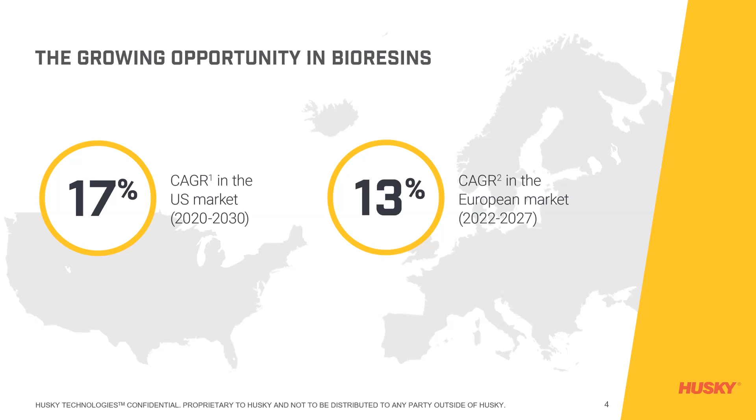We're looking at 17% CAGR in the US market between 2020 and 2030 (note: referring to projected years), and about 13% CAGR in the European market, between 2022 and 2027. For innovative brands and injection molders, this adds up to significant growth opportunities.

What's driving the growth in bioresin adoption? First is the consumer. Consumers today want to know that the products they purchase, as well as their packaging, are sustainable. Because bioresins are derived from relatively sustainable material and can be engineered to be biodegraded, many consumers feel bioresins are a healthier choice for the planet.

The second is ESG initiatives. Brands and molders are under increasing pressure to adopt an ESG strategy. ESG stands for environmental, social, and governance — it's a way of doing business. Using bioresins for injection molded products and packaging helps organizations meet their ESG objectives and signal to consumers that they're doing their part for the environment.

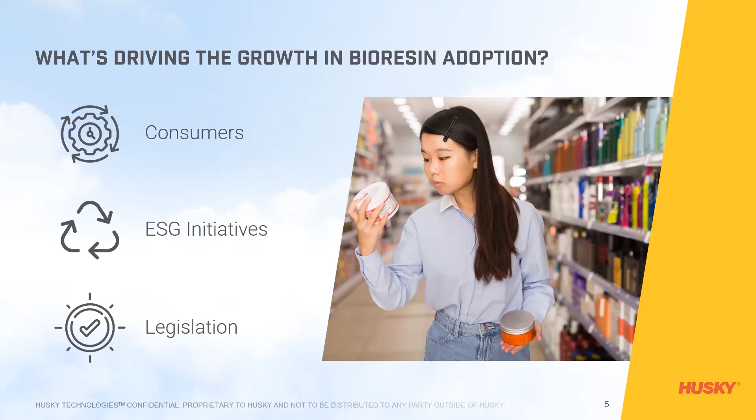And lastly, and probably the most important, there's legislation. New legislation and regulations are placing pressure on manufacturers to reduce post-consumer waste and plastic pollution. For example, in July 2021, the European Commission implemented new laws that ban or restrict single-use products made from petroleum-based polymers. Similar legislation is happening all over the world as we speak.

An overview of some of the bioresins we have available. Bioresins, sometimes called bioplastics, biopolymers, or biomaterials, refer to several categories of commercially available material that can be used in the injection molding process. What makes them bio-based is that they are made in whole or in part from renewable biological resources. These biological resources can include corn, tapioca starch, potato starch, vegetable oil starches, sugarcane, and wood pulp cellulose.

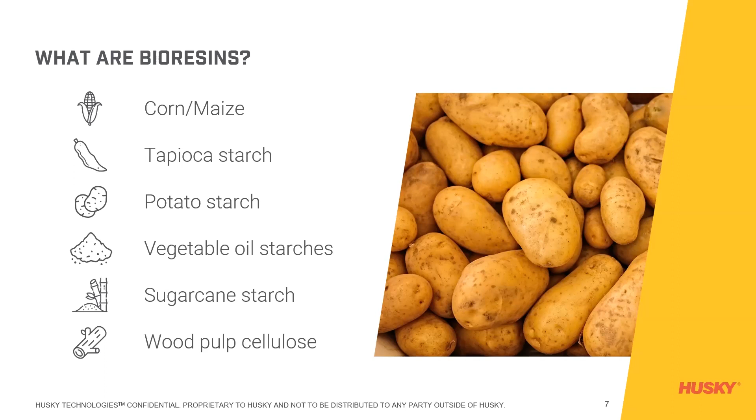The terms used in bioresins: when planning to use bioresins, it's important to note a few distinctions in the related terminology and features. Bio-based refers to the fact that biomaterials are used to create the resin. Biodegradable means the items will eventually break down in the natural environment. Not all bioresins are biodegradable.

Compostable means the material is biodegradable and breaks down within 3 to 6 months in an industrial composting facility, releasing valuable nutrients and leaving no toxicity in the soil. Not all bio-based and biodegradable resins are compostable.

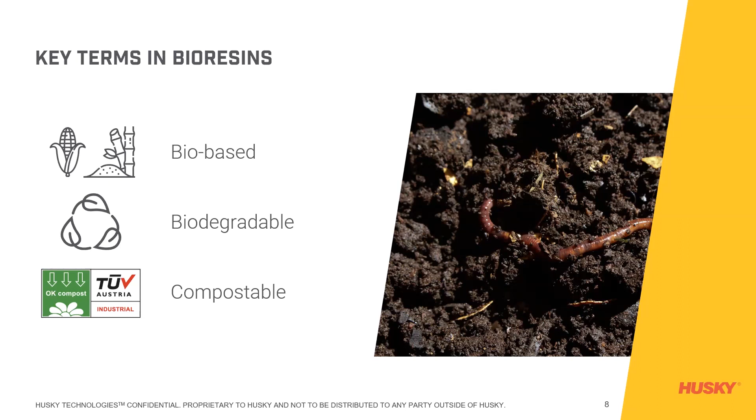This is an important slide, so I'm going to review those terms again because they're easily misunderstood in the industry today. Bio-based refers to the fact that biomaterials are used to create the resin. Biodegradable means the items will eventually break down in the natural environment, and not all bio-based resins are biodegradable—an important distinction. Compostable means the material is biodegradable and breaks down within 3 to 6 months in an industrial composting facility, releasing valuable nutrients and leaving no toxicity in the soil. Not all bio-based and biodegradable resins are compostable, so an important distinction with those 3 different terms.

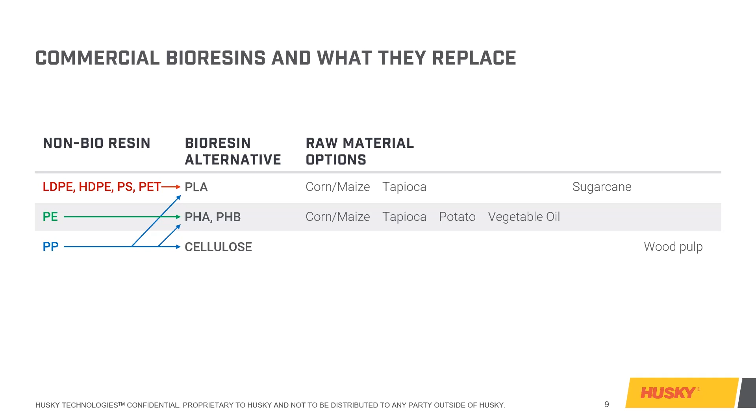So what commercially available bioresins exist, and what can they replace? Non-bioresins include low density polyethylene, high density polyethylene, polystyrene, and PET. Typically, those can be replaced with PLA. The raw material for PLA is typically corn starch or tapioca starch, and sometimes sugarcane. Polyethylene can be replaced with PHA or PHB, which again is corn, tapioca, potato, or vegetable oil based. Finally, polypropylene can be replaced with cellulose, usually made from wood pulp. So those are the 3 main categories of standard resins and the bioresins that can replace them.

A little more detail: PLA's raw materials are several different starches—corn, tapioca root, and sugarcane. The polyester is derived from renewable raw material sources, and it can substitute low density polyethylene, high density polyethylene, polystyrene, PET, and polypropylene. PHA is another one of these resins gaining popularity in the market, along with PHB. These can also be made from various starches, including corn, potato, maize, tapioca, and vegetable oil. The manufacturing process for PHA and PHB is quite unique—the polyester is derived from microorganisms through bacterial fermentation. PHA and PHB are really good at replacing polypropylene and polyethylene applications.

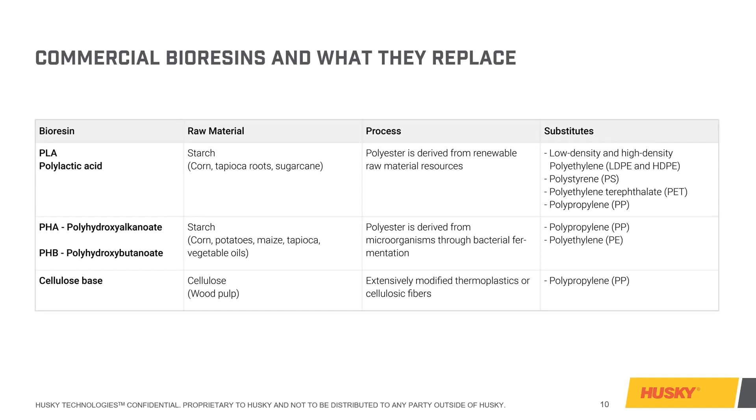And finally, cellulose based—basically wood pulp. It's a modified thermoplastic made from cellulose fibers, and it's good at replacing polypropylene.

Some of the challenges and best practices when working with bioresins: the first is material, probably one of the most challenging aspects of running these applications. Bioresin materials come with unique and challenging physical properties that can make them difficult to incorporate into the injection molding process. For example, many bioresins are highly viscous, require high fill pressure to fill molded cavities, and tend to be prone to leakage and weepage.

Next is manufacturability. Some bioresins are very temperature sensitive. To avoid this, the manufacturing process must avoid exceeding temperatures above a certain threshold. This can pose challenges for systems that are not designed to meet these challenges of bioresins.

Performance: using new materials brings a number of unknowns, especially in the area of performance. Many bioresins may not perform as well as traditional materials in terms of product preservation, longevity, safety, and other key performance criteria. These unknowns need to be addressed in order to achieve successful adoption of bioresin.

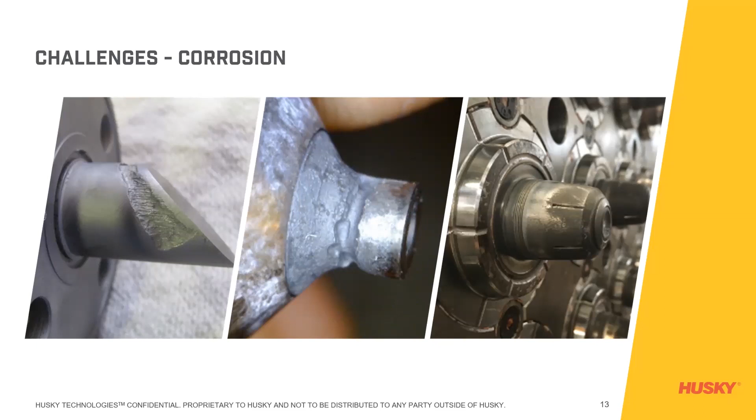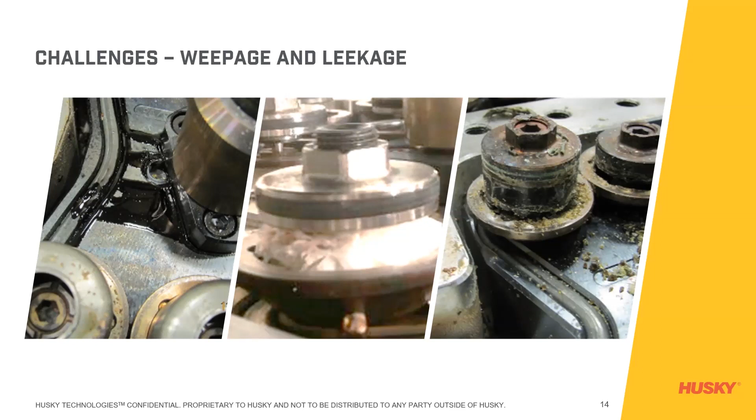Corrosion, as I mentioned, is one of the concerns with some bioresins. You have to take that into consideration when looking at the screw, the barrel, the steels used in the hot runner, as well as the mold itself. Some more examples of the challenges we see with bioresins: leakage or weepage within the hot runner system itself is commonplace with these resins due to their corrosive nature, viscosity, and how easy it is to weep or leak.

So let's talk about some of the best practices for succeeding with bioresins. To avoid issues like we've seen in the last couple of slides, here are the key best practices taken from our extensive experience with this application. First, we need to conduct an in-depth review of the application and the bioresin itself prior to any manufacturing step.

Ensure the hot runner and controller are optimized for bioresin. This should include ensuring that the manifold design is optimized, ensuring consistent preparation of the bioresin, and we'll take a closer look at some of these in the next few slides.

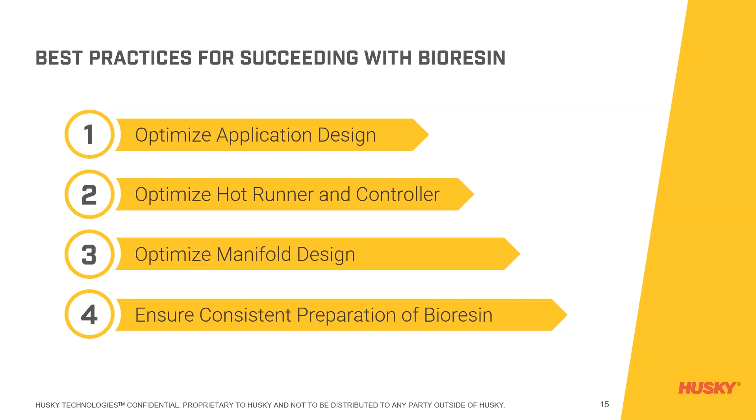So optimizing the application, or understanding the application to optimize the design. We need to conduct an in-depth review of the application and bioresin itself prior to any manufacturing step. And this should include a cavity fill analysis. Again, as I mentioned, with the viscosity difference in bioresin compared to traditional resins, it's typically a lot more difficult to fill the cavity. So that needs to be taken into consideration, and a fill analysis will help with that.

Evaluate the need for a resin test. So this is something we typically do at Husky, especially if it's a new version or a new bioresin that we haven't encountered before. We will request some resin into one of our labs and we'll do a resin test. This is usually recommended for resins with limited performance data or for particularly challenging applications.

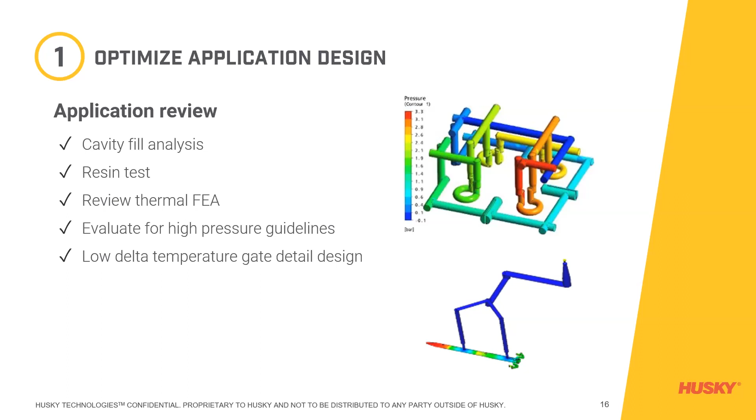Evaluate the bioresins for any guidelines on maximum pressure. Review the low delta temperature between the tip and the gate, which could cause leakage issues, something we need to pay attention to.

So specifically, how do we optimize the hot runner and controller? We need to ensure that the hot runner and controller are optimized. This should include corrosive resistant components if the bioresin is corrosive in nature. Weepage mitigation components, again, because it's so easy to leak, so easy to weep, especially with a valve gate system. We need to make sure we take that into consideration and design accordingly.

The type of gate, so a plunger gate that will give us the best possible gate quality. Individual tip control, improve heat distribution. Basically, we want the best possible thermal profile on that manifold so we don't have hot spots or cold spots that can lead to resin degradation.

And an IO connection with the machine to avoid resin degradation. Basically, what that means is that we would recommend a controller that can interface with the machine so that if the machine goes down for a certain period of time, let's say 15 minutes, that controller can automatically bank the heats so that we're not degrading the resin.

And again, I've mentioned corrosive resistance a couple times so far. With resins that are corrosive in nature, the more you degrade it, the more corrosive it gets, and it just dissolves all the steel around it. So certainly something you want to avoid.

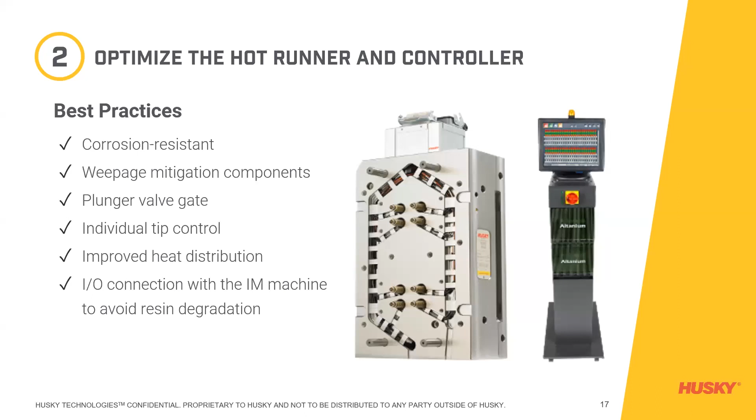Continuing with optimizing the manifold design. So what we want to ensure is that the manifold design is optimized for bioresin. This should include geometrically balanced channels. Basically, the distance from the sprue bushing to each gate or to each part, whether it's a 2-drop or 144-drop system or 144-cavity system, we want to make sure that that channel length is the same, and that's what we refer to as geometrically balanced.

Avoid bridging manifold heaters. So typically hot runner suppliers will have a heater on the injection side and another heater on the clamp side of the manifold. And many times we will bridge those heaters or connect those heaters together to have one thermocouple controlling both of those heaters. We would recommend not doing that to give you better control of the thermals of the manifold.

Melt channel size optimized for low pressure, reduced shear rates, and minimized residence time. So this is something that we as hot runner suppliers balance on every system that we build, trying to manage the pressure drop in the system, especially with bioresins, because of the viscosity, it has a tendency to lose a lot of pressure in the hot runner. So we want to take that into consideration.

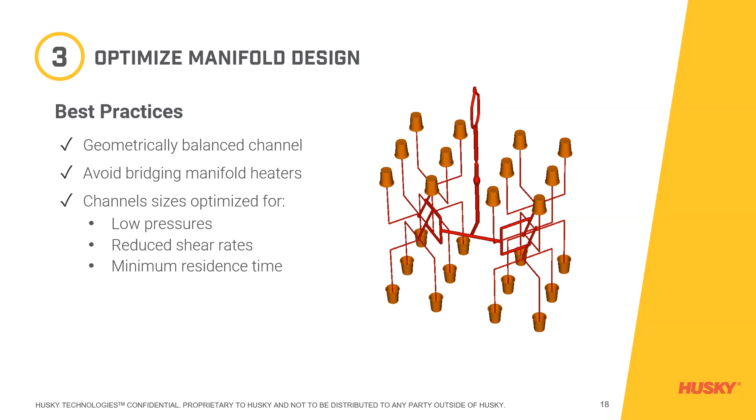We want to make sure we have an optimal shear rate, so we're flushing those channels every shot. And we want to minimize residence time because of the thermal sensitivity of a lot of these resins in the industry today. Husky engineers each manifold designed for the specific application and optimizes a balance between pressure drop, shear rate, and residence time.

So some of the inputs we're looking for is resin. So we need to know what type of resin it is, the family, whether there's flame retardant or other additives, the specific grade, similar grades that might be available for us to do the analysis. So one of the things when you do a mold flow, if you don't have the resin characterized, you don't have the rheological data of that resin. So typically you're looking for a similar grade.

Processing parameters. So we'd like to know the injection time or range of injection times that you intend to use, the melt and mold temperature, drop locations, part geometry, volume, thickness, ideally a part file, so we can run analysis on the part itself, and performance requirements, cycle time. Are we doing color change?

Are we looking for specific balance requirements? So those are all the inputs, and the output to that is a melt channel layout, melt channel diameter; it just optimizes the geometry of the manifold. System performance: it gives us the predicted pressure drop, the shear rate within the melt channels, the shear rate at the gate, and the temperature increase as a result of that shear rate.

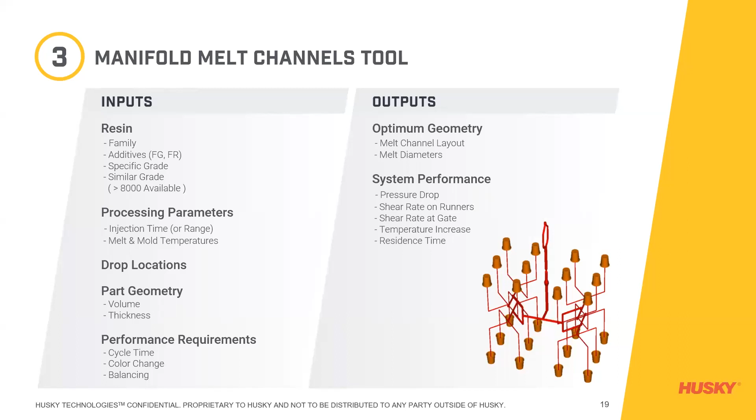Next is thermal uniformity. Husky performs a thermal finite element analysis, or FEA, which gives us a good indication of what the manifold temperature variation is going to be based on the specific design. By adjusting the heater wrap, the number of heater zones, thermocouple placement, melt channel layout, heat sinks, and manifold profile, the designer can optimize the thermal uniformity of the system prior to releasing it to manufacturing, again using FEA to help with that process.

Husky performs FEAs on almost all of our designs, and this is something we've been doing since 2013. Almost all of our hot runners are designed this way, and it allows us to confirm that the design is optimized and gives us the best possible thermal profile. That includes plate cooling and waterline routing on the plates, both the manifold plates and the backing plate.

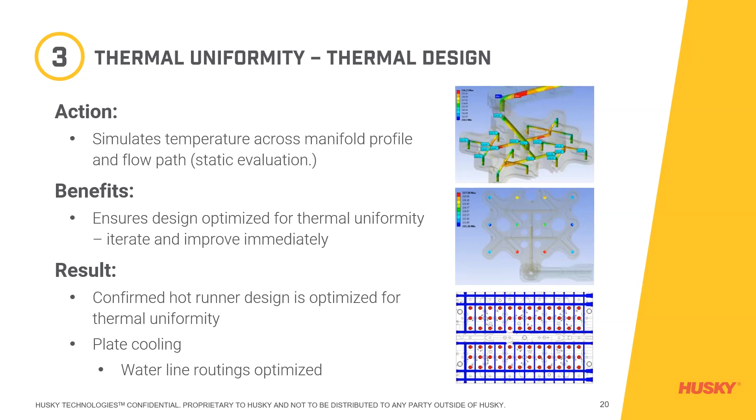So number 4, ensuring consistent preparation of the bioresin. This should include adequate drying before use. Many of the bioresins available on the market are hygroscopic, very hygroscopic. We're looking at moisture content less than 250 parts per million, and that's required to prevent degradation. Bioresins are typically supplied in foil-lined boxes or bags dried to less than 400 parts per million.

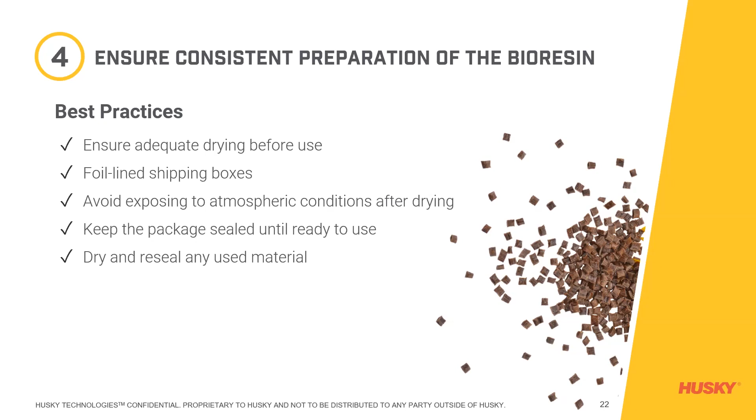The resin should not be exposed to atmospheric conditions until it's absolutely necessary, and then it should go directly into the dryer and molded. Every minute that bag is open, it's absorbing moisture, so you want to reduce or prevent that as much as possible. As I mentioned, keeping the package sealed until ready to use is the best practice.

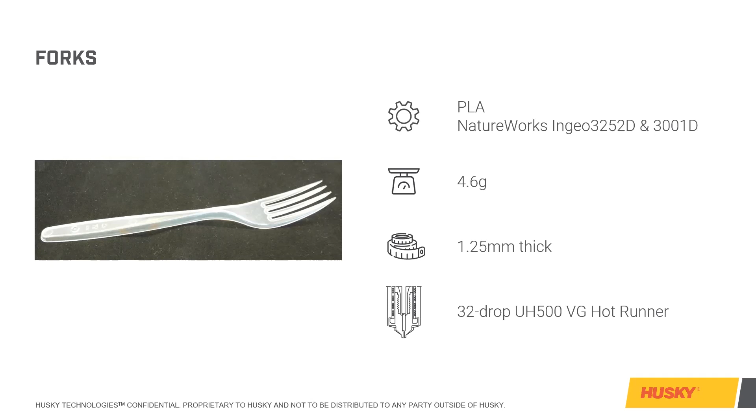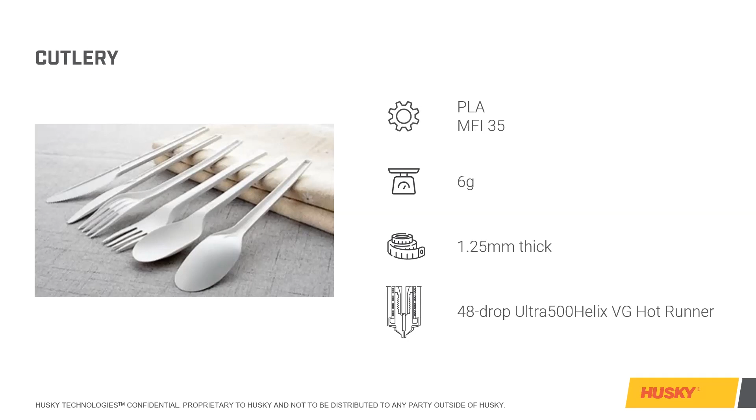Another PLA application, this was a family tool, so the customer molds all three, knife, fork, and spoon, at the same time. PLA with an MFI of 35, 6 grams, 1.25 millimeter wall thickness, and this was a 48 cavity, or 48 drop, valve gated system.

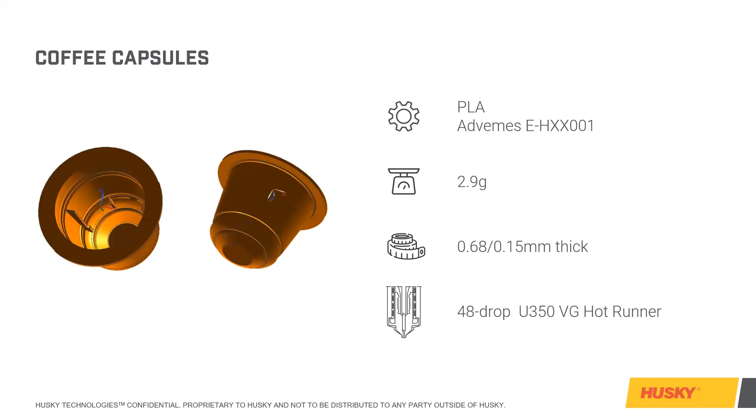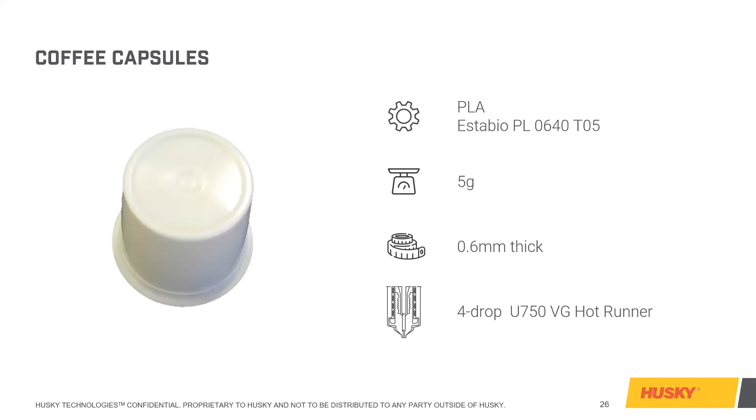Coffee capsules or K-cups, disposable coffee pods, is something we've done quite a bit of. This is another PLA application, 2.9 grams, fairly thin wall thickness, about 0.15 millimeter thick, and this was also a 48 cavity valve gated system. Another coffee capsule example, also PLA, 5 grams, 0.6 millimeter wall thickness, and this was a 4 drop valve gated hot runner system.

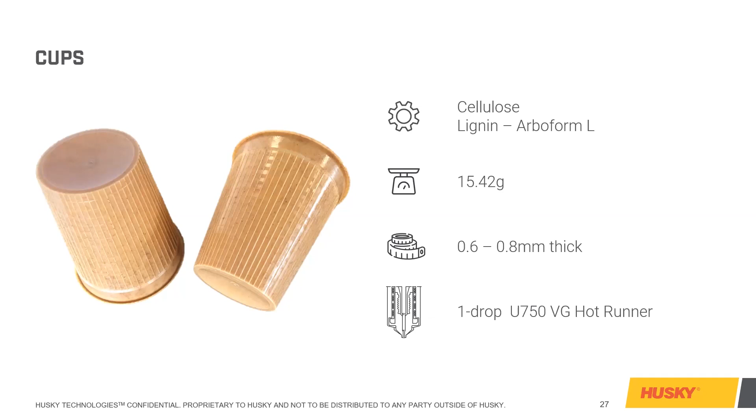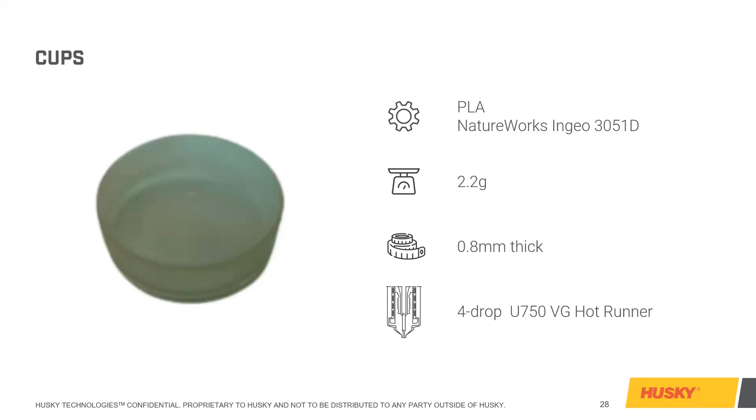This was an interesting one. This is a cellulose or wood pulp based resin, a fairly heavy part at 15.42 grams, wall thickness between 0.6 and 0.8, and this was a 1 drop system. The customer just did a prototype on this system, and it ran pretty good with this specific resin. Another cup application with PLA, 2.2 grams, 0.8 millimeter thick, and this was a 4 cavity or 4 drop system.

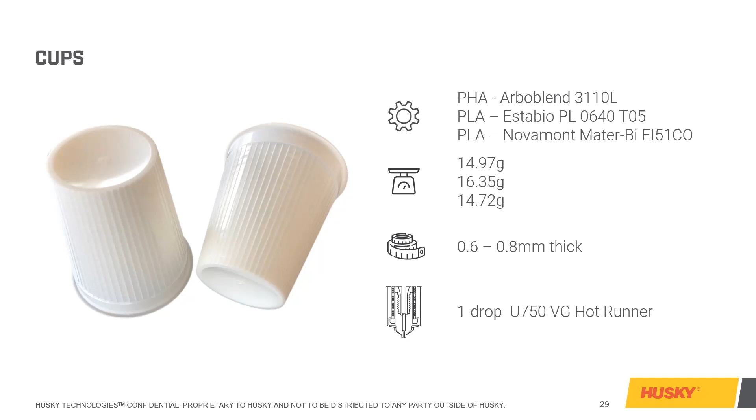On this one here, the customer ran several different resins, a PHA and two different PLAs from two different manufacturers, with three different part weights, 14.97 grams, 16.35, and 14.72, about 0.6 to 0.8 wall thickness, and this was also a single cavity.

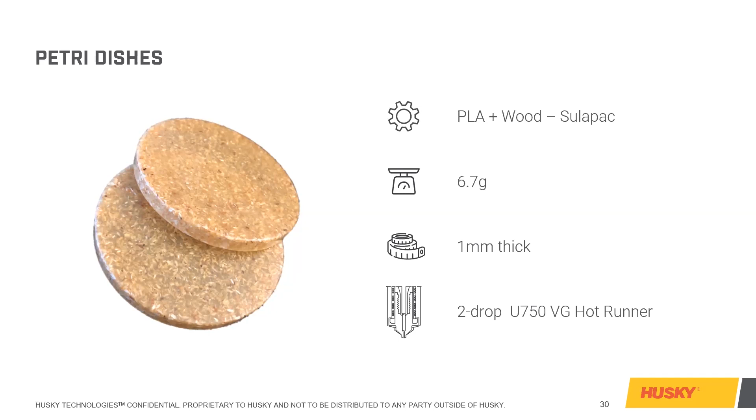A 6.7 gram part, 1 millimeter wall thickness. And again, this was a two cavity or a 2-drop system. We were able to make acceptable parts for the customer.

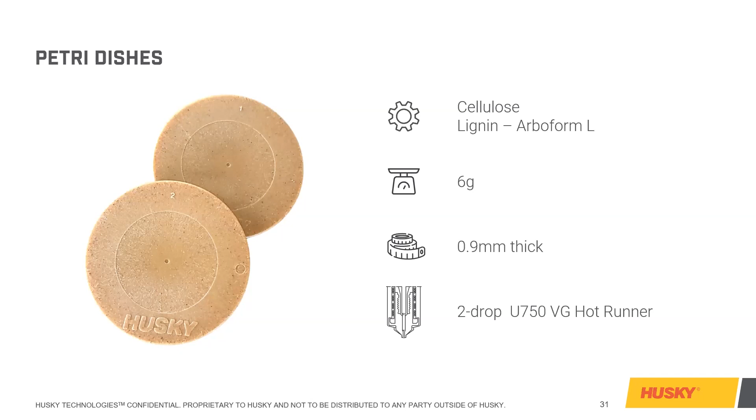So the core on this mold is adjustable, which allows us to change the wall thickness, which in turn changes the part weight to try and mimic the specific application that the customer is trying to run. So again, these are resin trials that we did with a Husky tool to confirm that the resin is processable, to learn as much as we can before we design the production system.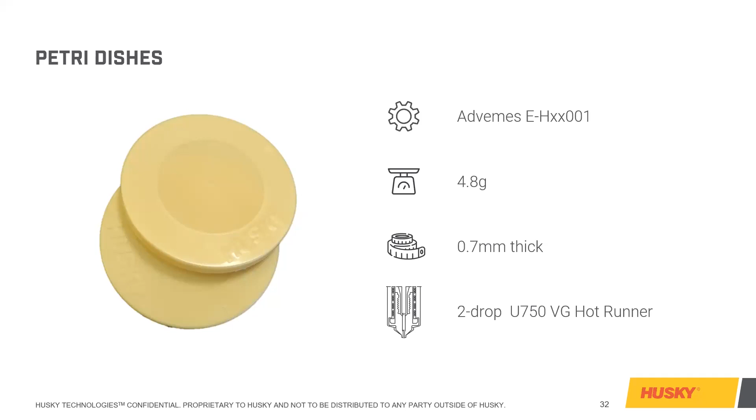Another Petri dish application, 4.8 gram part, no issues with this resin as well. So how does Husky enable you to succeed with technology, with our specific technology, our experience, and our expertise in the area? Husky offers the right combination of experience, expertise, and technology to ensure successful adoption of bioresins for your application. It takes all three to get it right.

So as I mentioned, a lot of the bioresins on the market are very corrosive. PLA, I would say, is probably the most widely used resin in the market, and PLA is extremely corrosive. As such, we've created a unique line of hot runners where we needed to change the steel of all the components that touch plastic.

So we offer a complete system solution, ideal for the successful adoption of bioresins into your injection molding operation. Our UltraMelt hot runner is the key component of that. UltraMelt is engineered for applications requiring excellent process and thermal control with minimal effects on the resin chemistry.

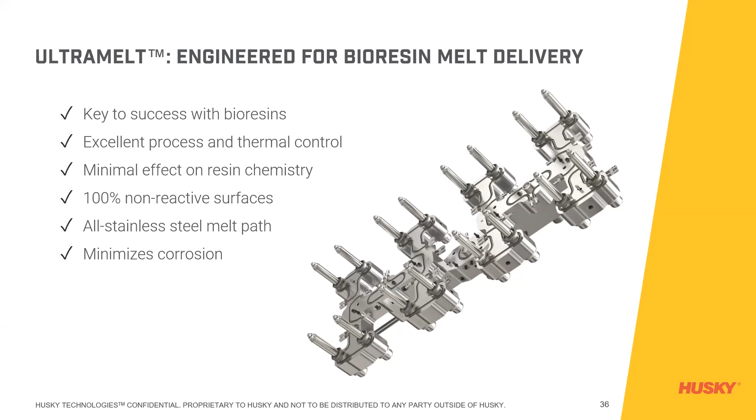This specific hot runner features 100% non-reactive surfaces and all-stainless steel components to preserve the sensitive chemistry of the bioresin, minimizing corrosion and other challenges. With the UltraMelt, the melt path is protected. So from the sprue bushing to the manifold bushing, the valve stem, the nozzle housing, the nozzle tip. So as I said, every component that touches plastic is either stainless steel or a non-reactive coating to be able to protect that steel and that hot runner to last you a very long time.